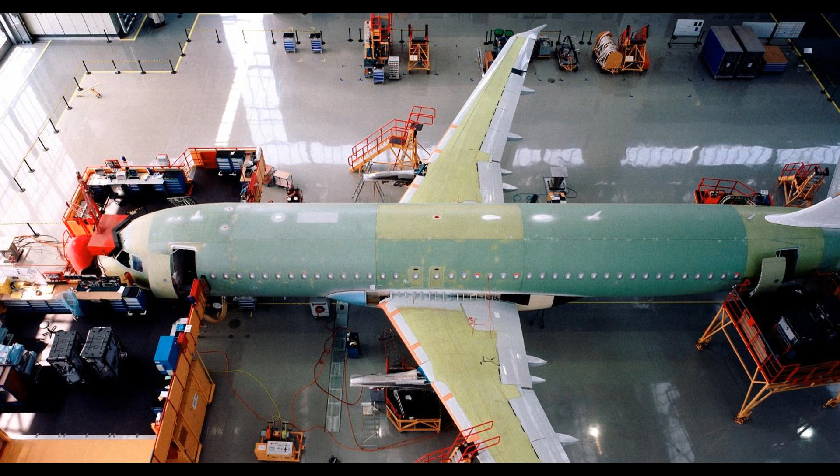To put you into context, as most of you know, over the last few years manufacturing and engineering professionals have seen their quality standards rise and their needs change. They now work with more complex parts, with more freeform shapes that need to be measured and controlled. The time to perform these measurements and quality controls is also under pressure, and it must be optimized in order to prevent downtime and streamline the development of new products.

So one question comes: how can 3D scanning help get through all of product lifecycle management without delay, in order to accelerate the time to market? This webinar aims to answer this question and demonstrate how 3D scanning helps overcome major challenges in order to launch a new product more efficiently.

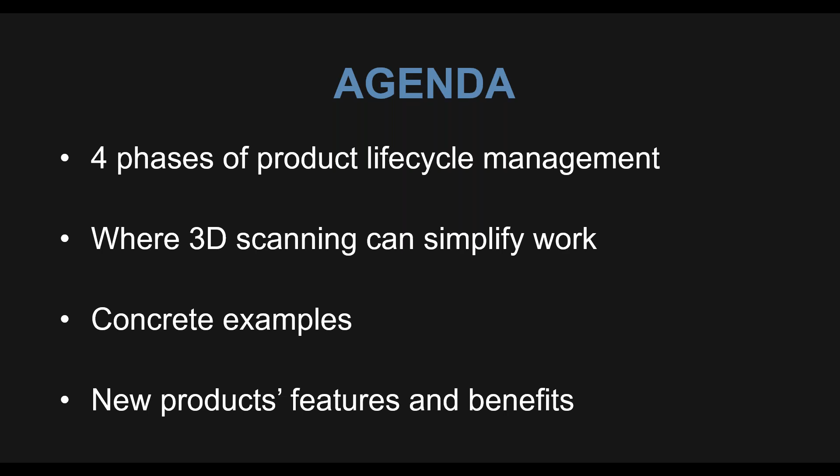To answer this question, let's look at the agenda we are going to follow today. First, we will review the 4 main phases of product lifecycle management. We will see where 3D scanning can improve and simplify work. We will illustrate the benefits of using 3D scanning with concrete examples in many applications, and then we will show our new products, features, and benefits. So first, I would let Simon start by quickly reviewing the main phases of product lifecycle management.

Thank you, Mathieu. Let's take a couple of minutes for the basics, just to make sure we are all on the same page. So what does product lifecycle management, or PLM, mean? By definition, it's just a standard process to organize ideas and guide action used to develop a new product. There are a couple versions of PLM, but let's take this simple and general one: concept, design, manufacturing, and servicing. Let's see how 3D scanning can help in each of these steps.

So first step, concept. This is the beginning of the development of a new product, where we generate new and crazy concepts. Very important step, because you define the requirements and specifications of the future product. Designers or engineers would create mock-ups or drawings, typically making iterations until the styling lines and requirements satisfy the development team. At this stage, they mostly validate the look and feel of the product.

During the concept phase, 3D scanning is very useful to perform environment and competitive product analysis. It's always a good idea to analyze competitive products and evaluate how they could be improved. The environment of the object can also be critical if you need mounting point or clearance information, for example. The information provided by a 3D scanner enables designers to start with reliable measurements they can trust.

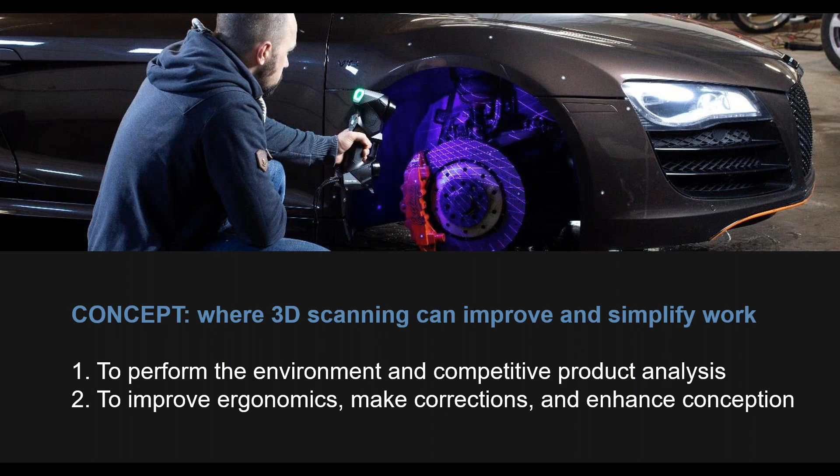So the design phase is where you want to get as close as possible to the real product. It's time for the designer to get their first fully functional prototype. With the real prototype in hand, the engineer can validate if the engineering is functional, if the components fit and assemble correctly, and if it meets the requirement.

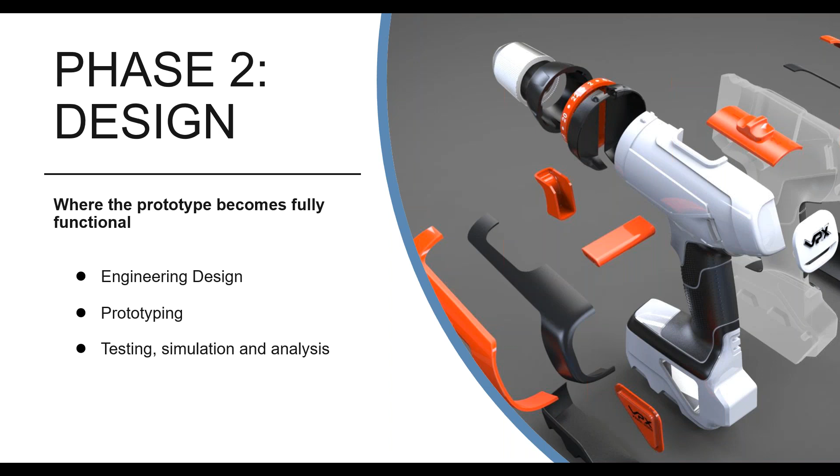It's also during the design that simulations such as finite element analysis, FEA, are performed to optimize the design. As in the concept phase, the design phase generally runs in a loop to get a better and better product at the end.

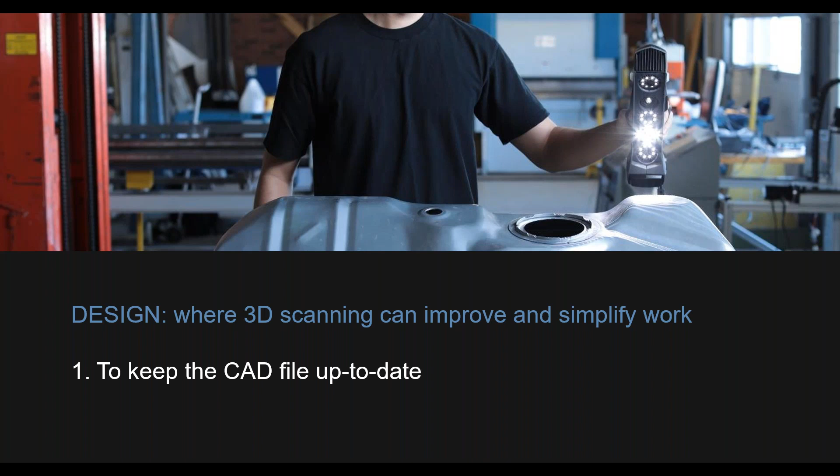So during design, 3D scanning is essential to keep the CAD file up to date after making modifications on the physical prototype. The 3D scanner can also be used for quick verification or inspection of the prototype itself. So once complete satisfaction has been reached, it's time to move on to the next phase, the manufacturing.

So in manufacturing, this is where units are produced. At this stage, production creates the tooling such as die, mold, fixture, or jig to manufacture the part. Once the tooling is validated and the first article inspection is performed, the quality control will measure, control, and document critical features to ensure constant production quality.

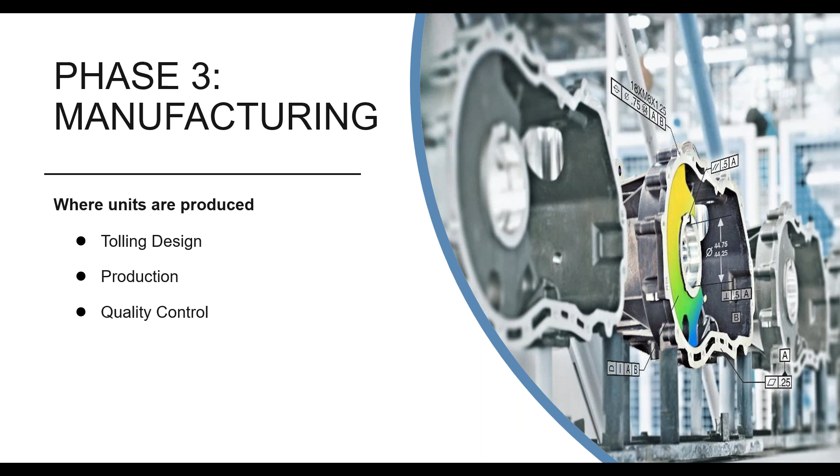During manufacturing, 3D scanning is very useful to design suitable tooling. It allows effective validation of the tooling and can also help to keep the CAD file up to date for those tooling as well.

As soon as the first unit is produced, 3D scanning is used to inspect and control the quality of the production by comparing the scan data with the CAD model, the first design. Since it can be used directly on the production floor, it can detect manufacturing problems quickly. If defects are detected, they can correct the tooling according to the measurement extracted with the scanner.

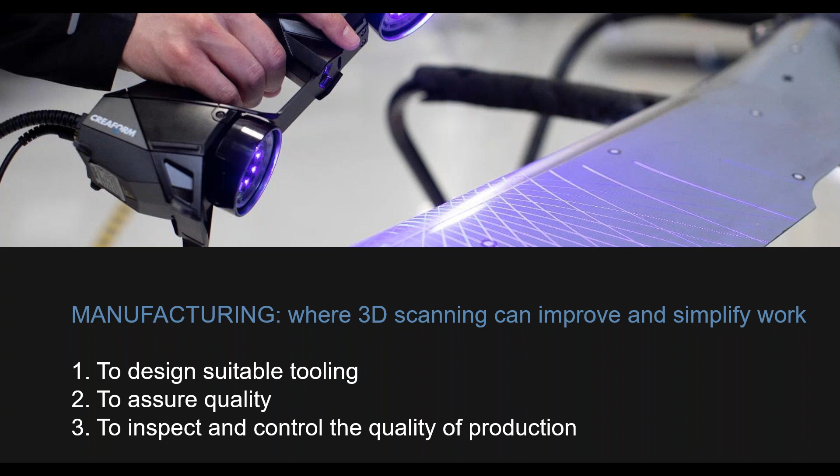So now we reach the final phase of the PLM, the servicing phase. This is where the unit comes to life in hand. For mass production that stretches over several years, as you know, tooling equipment may wear. So for instance, it may be needed to document how a mold wears out in order to maintain it. In some cases, it will be necessary to repair or replace components to maintain the production quality.

So where does 3D scanning help during servicing? 3D scanning allows engineers to document precisely how the tooling wears and helps make decisions to maintain the quality of the production setup. In case of a production issue, the scan data will help determine where to make corrections.

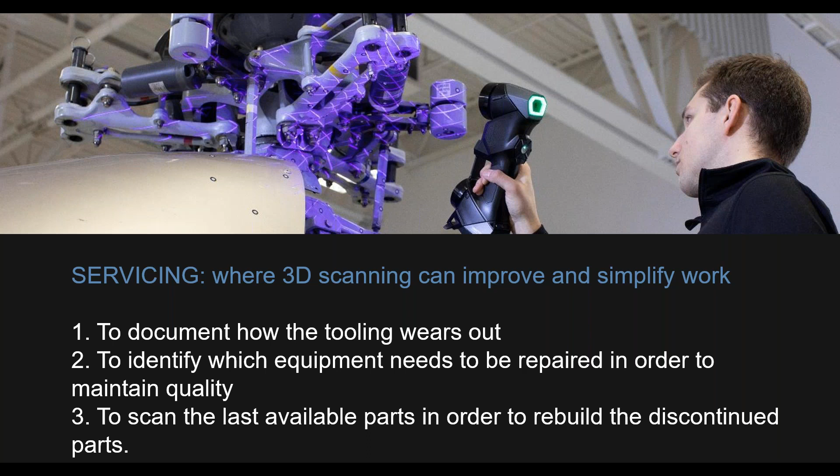And finally, if a system is made of old parts that can no longer be found on the market, 3D scanning is actually very useful to scan the last available part or broken part in order to get the dimensions, redo the CAD model, and manufacture the part again.

As you know, the challenges that development teams face are important. They must continuously innovate in order to deal with growing competition. So designers or engineers have to deal with more complex parts, but still have to deliver products faster than before. So yes, 3D scanning can definitely help them during different tasks, but it also makes the work more bearable and more efficient.

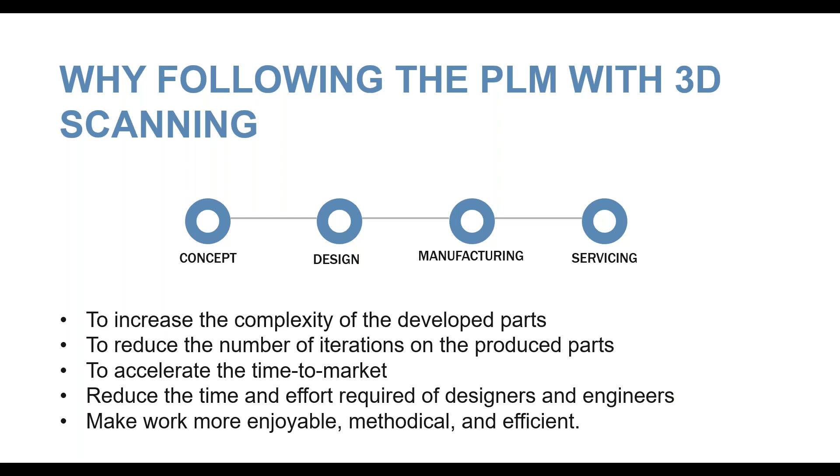So now I want to summarize graphically the advantages of adding 3D scanning to your actual PLM. Let's take this illustration with only the first three steps, concept, design, and manufacturing, to simplify the example.

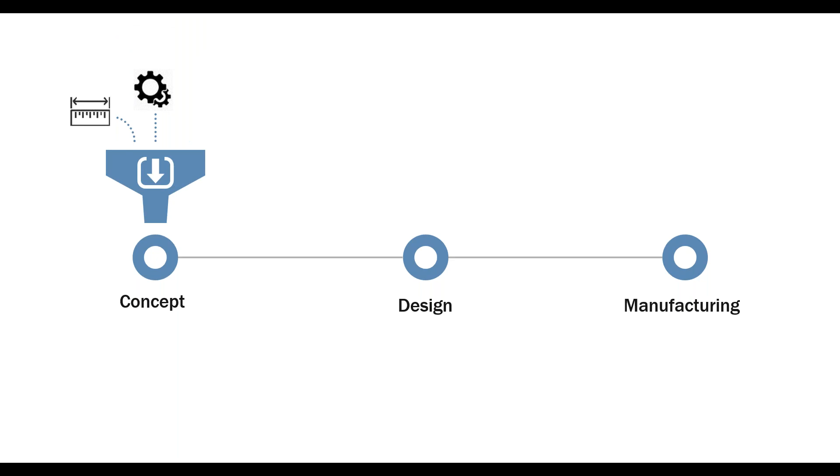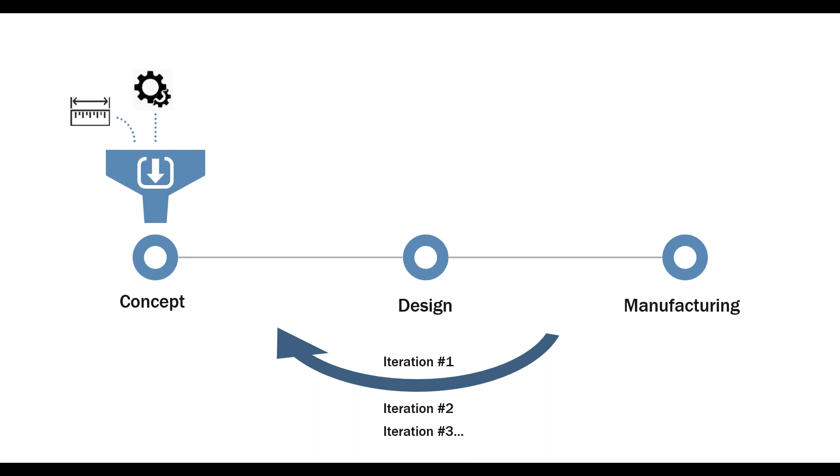As you know, you always start the concept with some input or some information. Then during the following steps, the designer or engineer will make several iterations to meet the final requirement. Those iterations during each step will actually slow down the outcome. And with simple inputs, the engineer will get simple output as well, a design that probably every competitor is able to do.

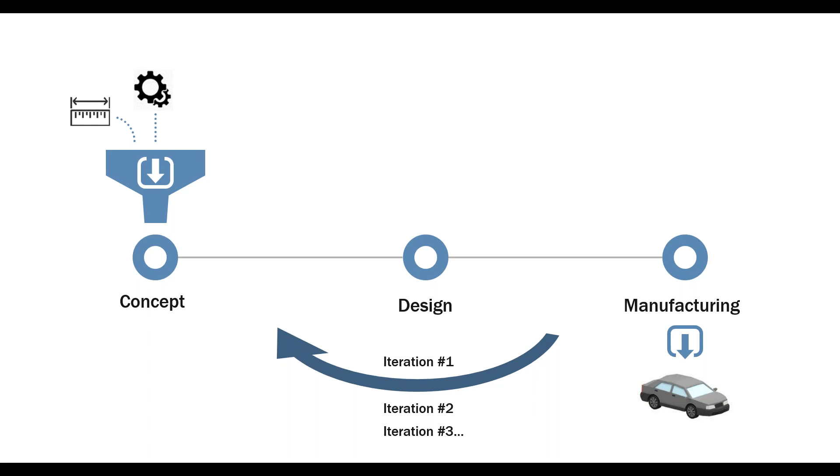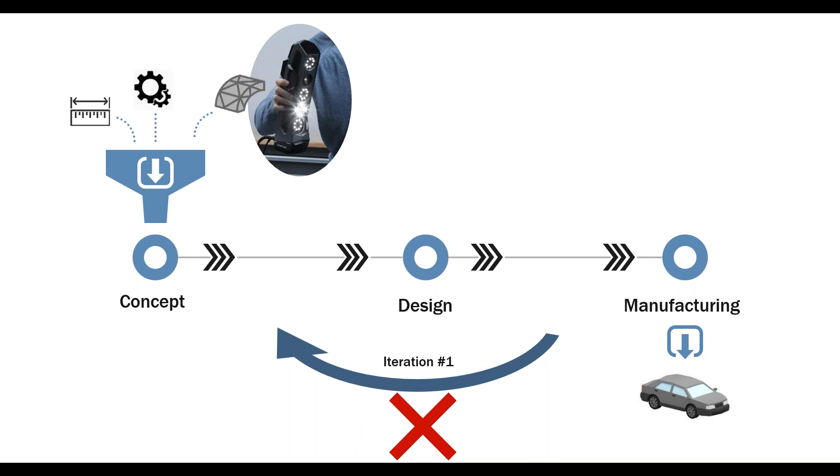But when adding 3D scanning as an input, here's the result: it will actually speed up the whole process and reduce the number of iterations. This is because the 3D scanner gives you critical information quickly to make clear decisions during all the different steps of your PLM, and having a better input will give you a better output as well.

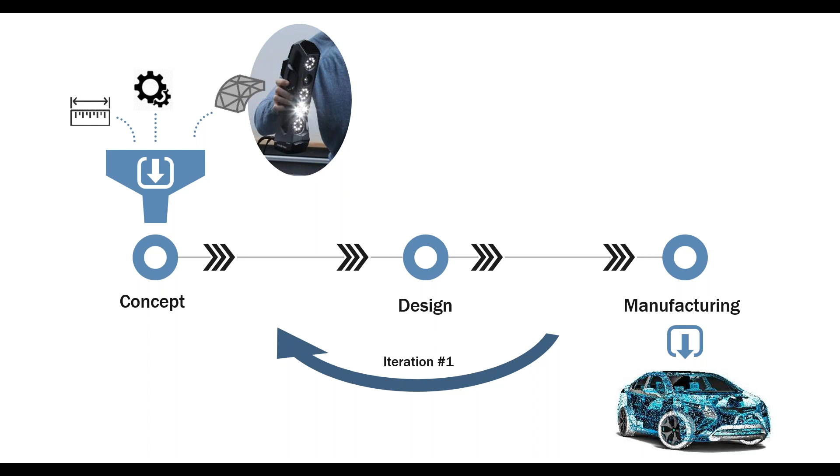So here's the reason why product development professionals need 3D scanning in 2019: a faster process and a better product at the end that will stand out from the competition.

So thank you, Simon. I will take it from here for the next few slides and illustrate the product lifecycle management with 8 concrete examples in different applications, such as product development and design, reverse engineering, rapid prototyping, inspection and quality control, maintenance and repair. And these applications will take place in different industries, such as automotive, heavy industry, consumer product, manufacturing, aerospace, and power generation.

So the first example is about product development and design in the automotive industry. And here is the question to answer: how can we efficiently design parts for automotive aftermarket without access to CAD files? For instance, how can an interior carpet be designed and quickly available for new car models?

Well, the challenge here in this product development is the multitude of car brands and models available on the market, which are also renewed every few years. Each car model requires a custom design, and measurements must be taken quickly on complex surfaces. This development must also be done very quickly to be the first on the market.

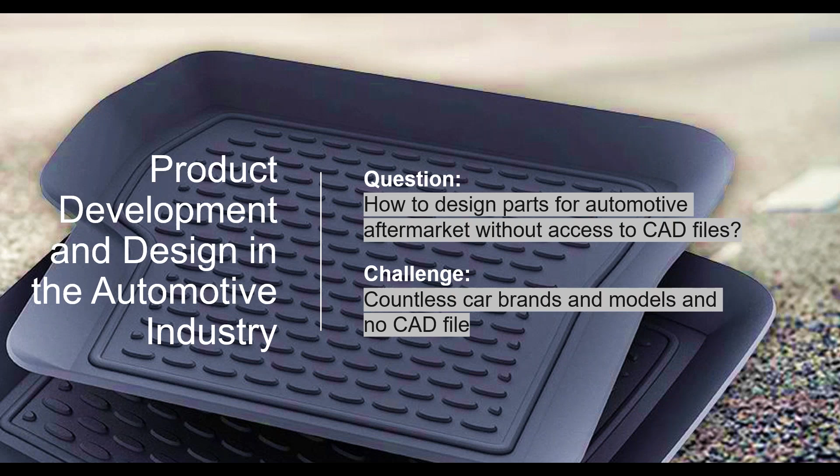So the solution is to use a portable 3D scanner to quickly capture these complex surfaces within a few minutes. This can be done anywhere as it requires a very limited setup time and acquisition time.

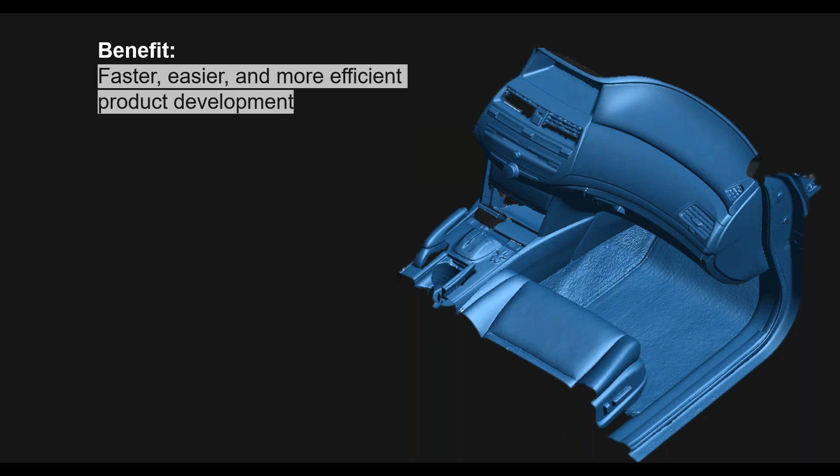Let's look at our second example, a reverse engineering application in the heavy industry. Now the question we are answering here is how to reduce product development costs with reverse engineering. Let's take the example of a bulldozer where an attachment such as a side boom has to be designed and installed. The main challenge here is not only to take a few measurements on where the attachment will be fixed, but to get all the surrounding information to prevent any interference with the attachment, especially with moving parts such as side booms. Without the CAD file available, the surrounding environment is unknown.

Another challenge here is to measure accurately spacing or distances between different objects or fixture points. Often direct distance measurement is impossible since there are different components blocking the way. This can lead to inaccurate measurements or a long measurement process if these components have to be removed. So here again, using conventional measurement tools is not an efficient solution. Instead, using 3D scanning will help to gather 3D data of all the surrounding environment, a process that would otherwise be lengthy using traditional measurement tools.

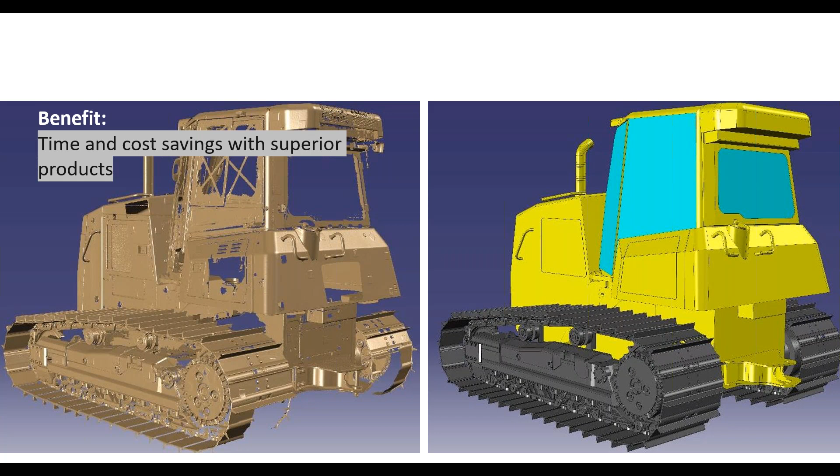This will provide the designer with the position and a high level of detail for every component, whatever their size, geometries, and finishes. Having all the surrounding environment is a huge benefit as it will allow preventing issues such as interference, as we talked about earlier. The accuracy of the 3D scan measurement is also another benefit compared to traditional measurements. It will ensure a proper fit right away when designing the fixture or other components, and it will eliminate adjustments and iteration in the design process. At the end, 3D scanning technologies will reduce the amount of engineering time spent on completing the project, which enables the manufacturing company to focus more on part design and also save cost.

Our third example, a rapid prototyping application in the consumer product industry. Again, the question now is how to accelerate rapid prototyping and production cycle time with clay models and 3D scanning. First, when designing a prototype, it is wise to make a first model in order to hold it and try it, as the physical reality is often different from the CAD design. Often designers will make adjustments, change style lines directly on the prototype until the perfect design is found. So the challenge here...

...is how to bring back these modifications to the CAD model. This can be pretty challenging, especially when dealing with complex parts and small details like on a helmet. The other challenge is to analyze what the market is already offering to ensure that the forthcoming design is better. Again, how can this information be brought back to the designers and ultimately optimize the final design?

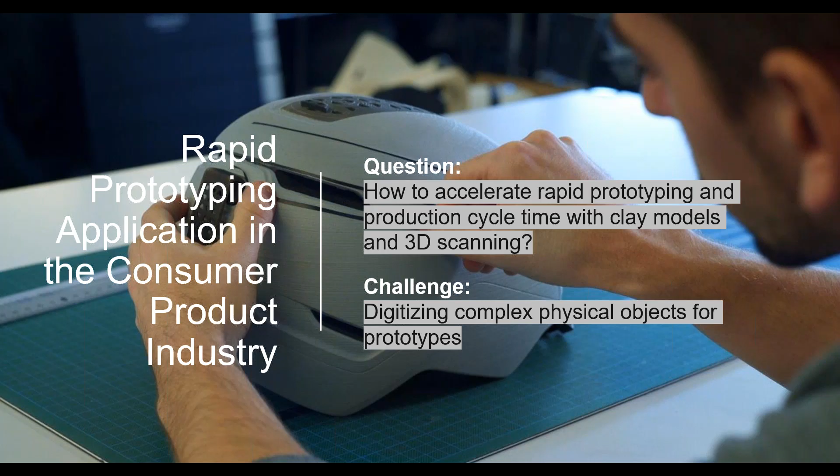So often clay models are used to design the first prototypes. Designers and engineers then have the flexibility and freedom to play with the prototypes until they achieve the perfect shape. 3D scanning is an efficient solution here as it allows capturing rapidly the clay model and its small details or complex surfaces that can afterwards be easily converted to CAD files.

The benefits here are diverse. First, 3D scanning will save a lot of time and accelerate time to market by eliminating the need for long measurement sessions and modifications to CAD files. The competition analysis can also be done quickly by converting the samples to digital models that are available to all designers and engineers anytime and anywhere.

Now our fourth example, a rapid prototyping application in the automotive industry. So how can we improve concept car design processes using 3D scan to CAD?

Well, the challenge here is a bit similar to the previous example. The first steps of the car design are usually done on a drawing board, and then the artist continues his work by realizing a clay model that he will refine. But how does one move from the artistic design to the engineering model, the CAD file, at the end?

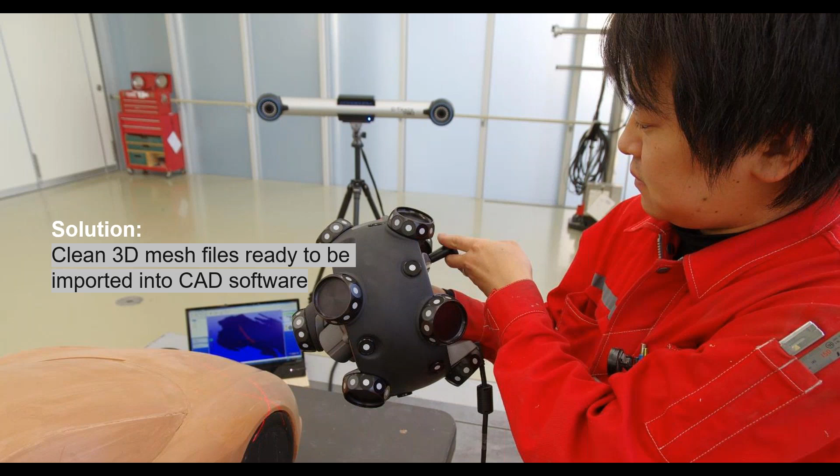Here a 3D scanning solution is essential to measure the clay model. The 3D scanner will provide a clean STL mesh file that is ready to be imported into CAD software. From there, engineers can start building each part according to the model designed by the artist. The benefit of 3D scanning is that the path between the clay model and the CAD file is much faster, because measurement and generation of accurate results are accelerated, and data transfer and editing are also simplified.

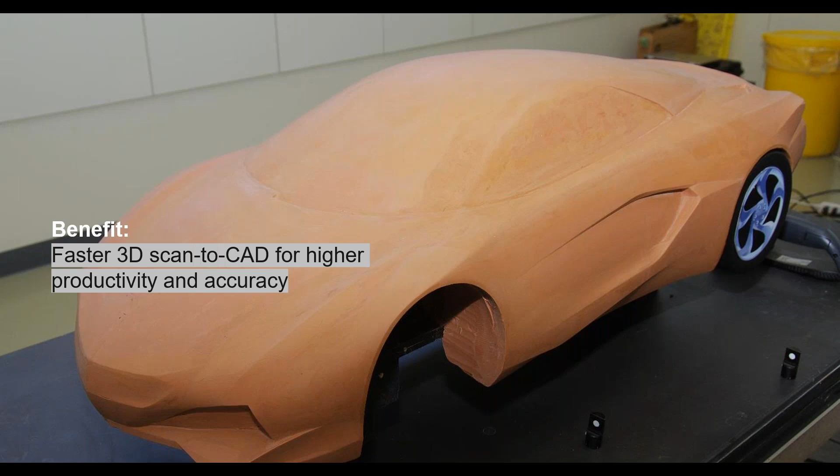Our fifth example is about an inspection and quality control application in the manufacturing industry. How can we accelerate the inspection process in tool design with intermediate quality checks?

When designing a tooling, an iterative process of quality control ensures that the part built from the mold or die is built correctly and meets technical requirements. The challenge is to speed up this quality control process by reducing measurement time and limiting the number of iterations for adjustment.

Traditionally, the inspection process was done using touch probing with CMM. Instead, using 3D scanning helps accelerate the inspection process. A 3D scanner can acquire more than 1 million measurement points per second, compared to just a few with touch probing. This acquisition speed and data density allow creation of deviation color maps.

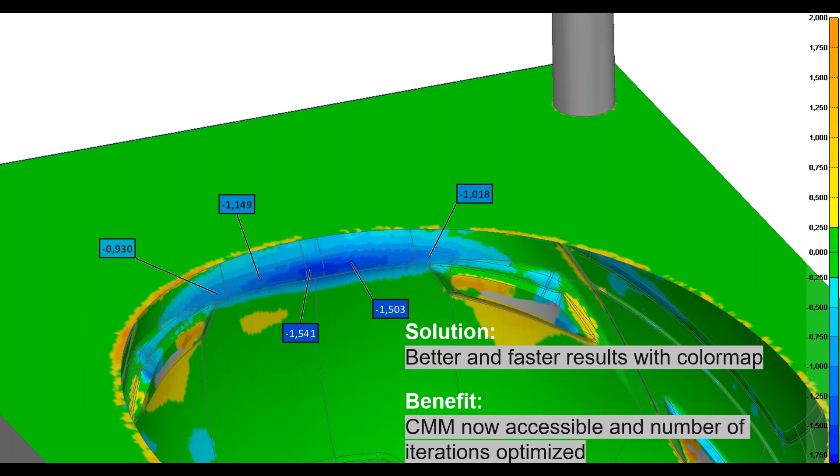These color maps give a much better visual overview of the deviations, and show precisely where to make adjustments on the mold or die. In the end, the benefits are a reduced number of iterations in the quality control process, and reduced bottlenecks created by CMM touch probing inspection.

Our sixth example is also about inspection and quality control, but in the aerospace industry. The question is, how can we develop, manufacture, and inspect a casting of superior quality in less time?

The main challenge when creating a casting is to minimize the amount of material used, for two main reasons: to avoid wasting material, and mostly to reduce the machining time needed to remove extra material. But how can we ensure there is enough material before machining, while making sure we're not wasting precious and costly machining time?

The best solution here is to be able to inspect 100% of the surface, and that is the challenge with traditional measurement tools.

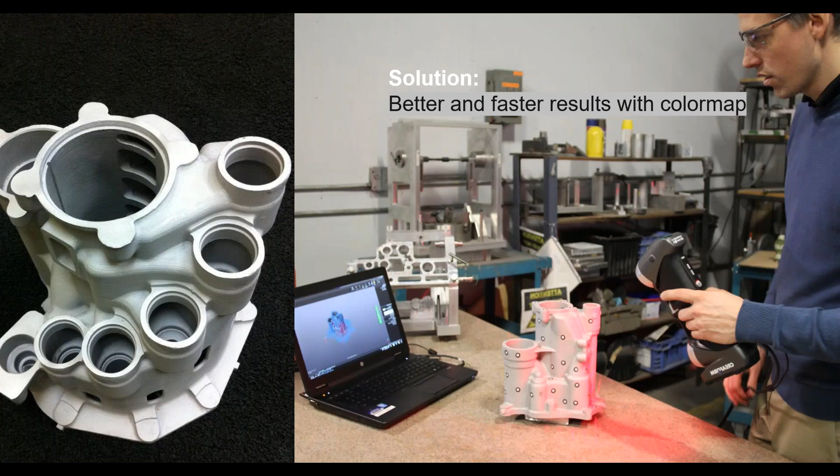Touch probing equipment such as CMMs are pretty good for providing highly accurate data on critical parts, but it would take hours to measure 100% of the casting surface.

Unlike touch probing, 3D scanning provides a better solution with an overall 3D deviation color map of the part, indicating whether or not there is enough material before machining. All inspection data can be provided quickly and with no delay.

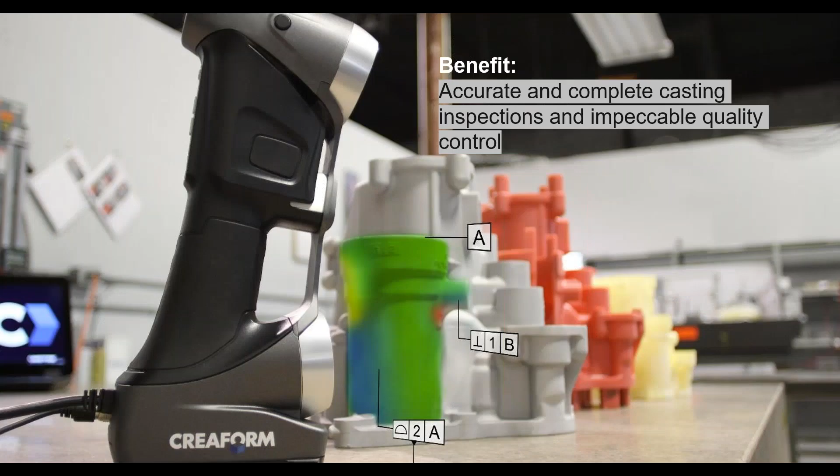So the benefits of using a 3D scanner: it accelerates the casting manufacturing process, and a more complete inspection process allows issues to be identified beforehand and fixed before they cost more time and money.

Let's move to the seventh example. It concerns a maintenance and repair application in the power generation industry. The question here is, how can we replace headers on a main steam piping system at a power generating facility?

Replacing these headers in a power generating facility can be challenging. Most of the time, CAD models are not available, so engineers have to design the new parts by measuring the actual physical part. Additionally, these headers are often located in very confined or hardly accessible spaces that are only available during limited power plant shutdowns. So both the on-site measurements and the later replacement and installation must be done quickly.

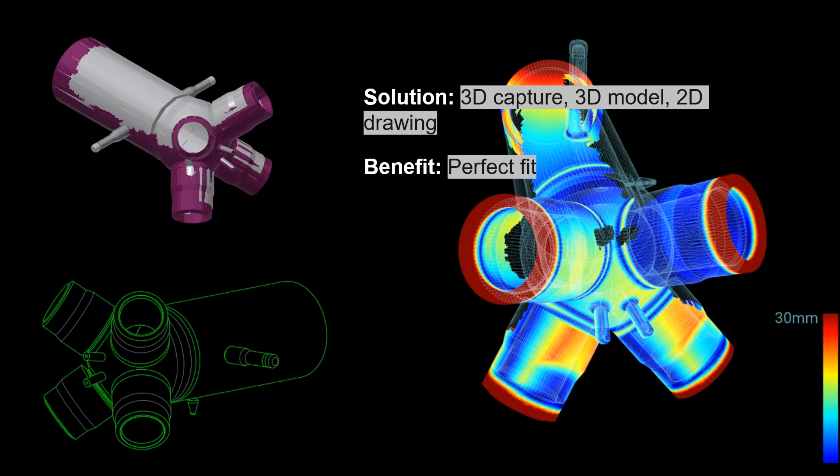That's a challenge. Inaccurate or missing measurement will lead to a bad design that can require hours of costly on-site adjustment when installing the new header in the next shutdown. Worse, it could delay the installation if adjustments to be made are too critical. Using a 3D scanner here will solve these issues. First, it will ensure all measurements are taken when the equipment is available. Second, it will ensure that measurements are highly accurate and that the replacement part will fit precisely. At the end, it will accelerate the design and replacement time as well as its cost.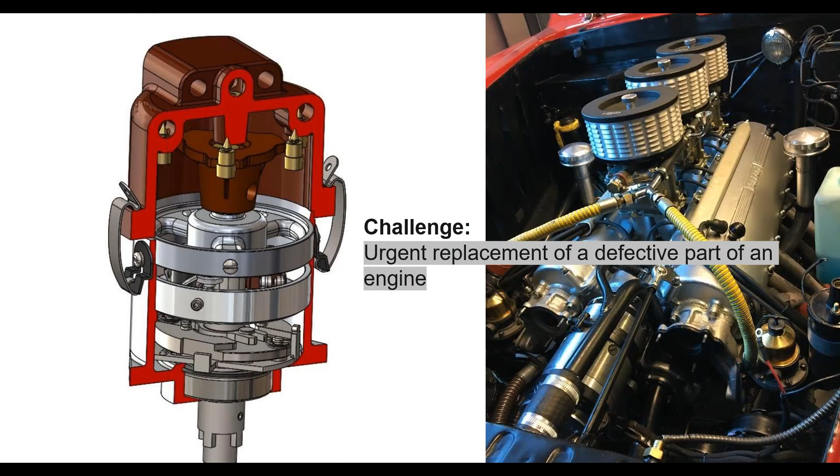And finally, the last example concerns a reverse engineering application in the automotive industry. This is a pretty neat one. The question here is, how can we participate at the Monaco Grand Prix despite a broken engine 8 weeks before the race? As you might know, the preparation for a car race always requires a series of tests on the engine, and all the components must work at their full potential, since the race would put them to the test. But what can one do when the connecting rods, the rod that moves the piston up and down, come out of the side of the engine 8 weeks before the race? Well, this is a challenge that one of our clients had to face. He had to repair his engine within a few weeks of the competition, but not all parts could be fitted.

Well, thanks to a 3D scanner, the data from the parts to redesign were quickly scanned. The scanner was able to generate a precise mesh that was easily transferred into a CAD file. And 5 days later, 12 pistons went into production, and the new parts were ready 3 weeks later. So the benefit here in using a 3D scanner is it improves reaction times by allowing accurate measurements to be quickly taken anywhere. It also allows sending these digital models to anyone, anywhere, to start the design and production process very quickly. This accelerates the design process, and production of custom parts is done at record speed. So that's the end of the examples I had to present.

I will let Simon continue with the next slides and explain how Creaform's new products can help in your product lifecycle management.

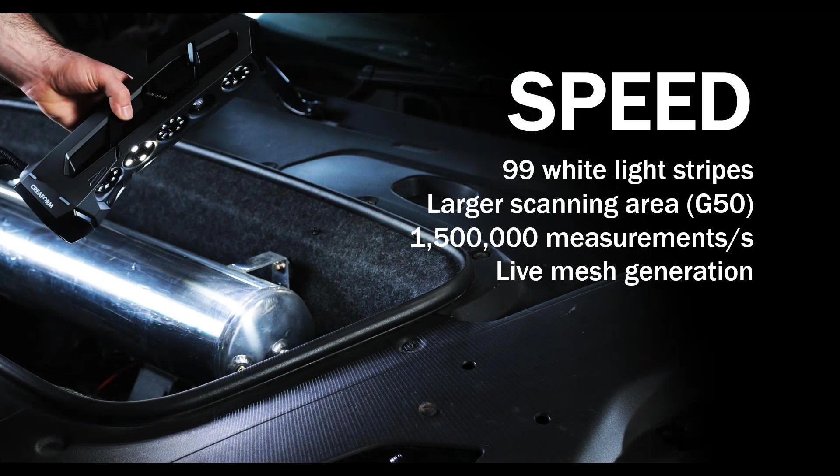So first, let's talk about speed. The GoScan Spark uses a 99 white light stripes to acquire the data. It now has 3 times more measurements per second than the previous generation, with 1.5 million measurements per second. New algorithms in the acquisition software provide live mesh generation that delivers the speed and visualization to help our customers capture quickly and easily any surface.

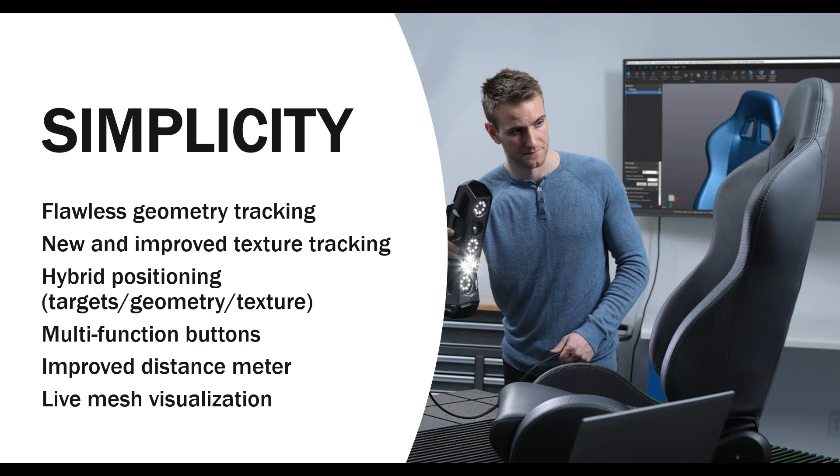So speed is not everything. Since our engineers are not experts in 3D scanning, they need a system that is extremely easy to use. This is why we added a lot of improvements to the scanner and the software to get robust tracking using geometry, texture, or targets to provide the best user experience. Let me explain a bit more about the tracking. This is the result of the best and easiest hybrid positioning available on the market. The GoScan Spark can use geometry, texture, and targets to align all the 3D data together. So translating that into the mind of our product development engineer: don't think about how it works, just go, just scan. This is the kind of simplicity that they need.

As you can see here on the image, this is the kind of object that can be easily captured with the GoScan depending on your application.

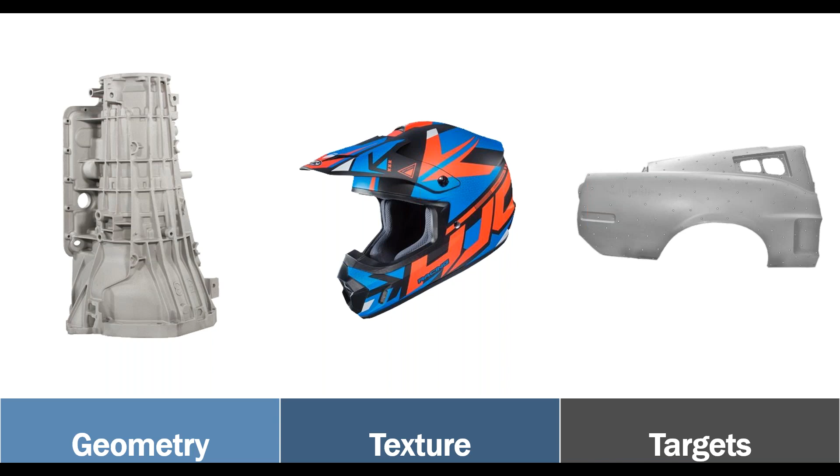All this without having a quality scan is simply irrelevant to designer and engineer. They need quality inputs. So this is why we changed the camera for 3 high resolution cameras for the geometry and 1 color camera that can create 200 dpi color texture.

So yes, with the GoScan Spark, we also capture the texture of the object. In terms of resolution, the GoScan Spark has 4 times the resolution of the previous generation.

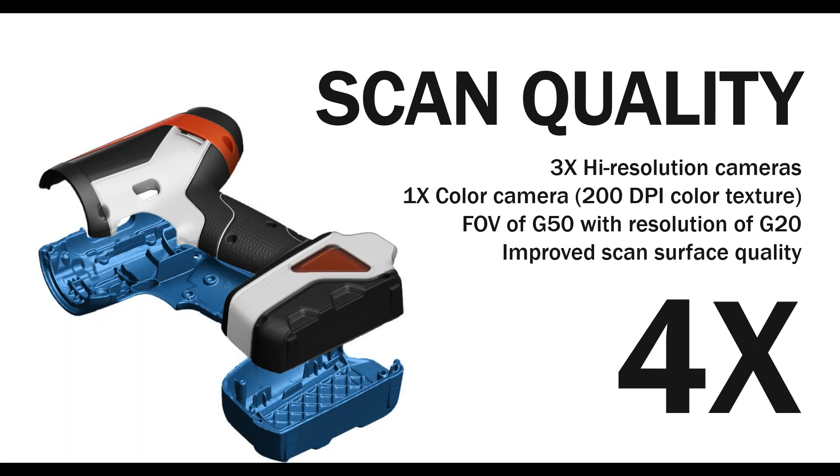So in summary, the GoScan Spark provides the speed, the simplicity, and high quality scan for a large range of product development applications.

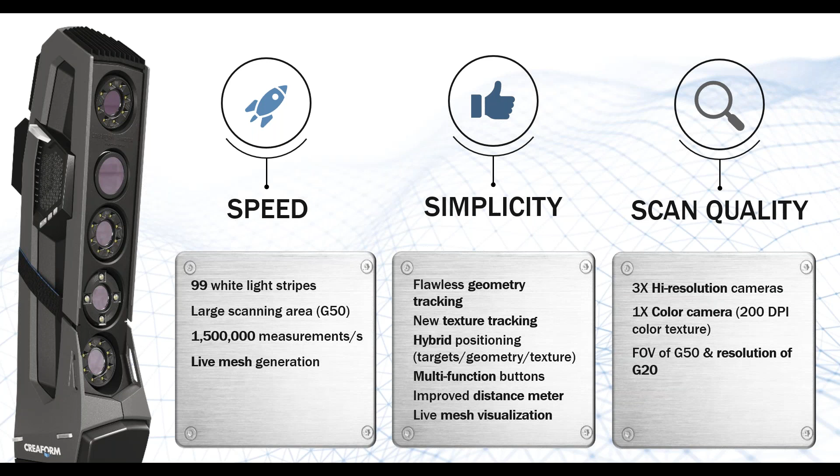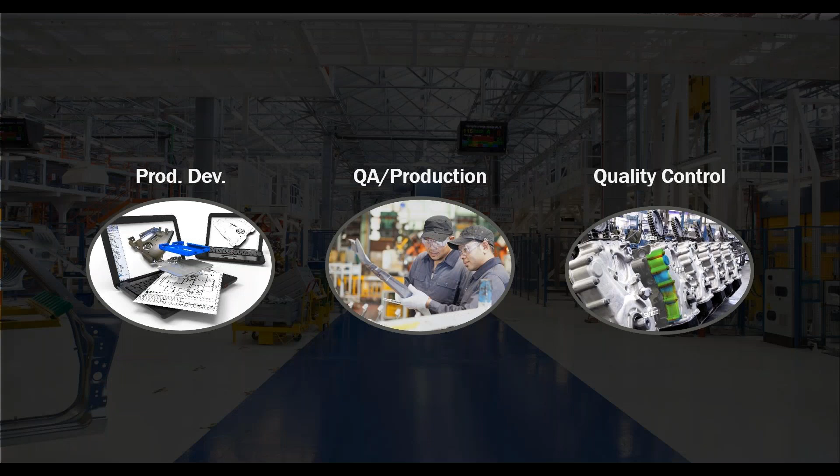Now let me introduce you to the new HandyScan Black, the reference and portable metrology grade 3D scanning. A new design with new optics to better meet the requirements of our customers. The HandyScan has always been the go-to scanner for a lot of situations and for a lot of our customers to solve problems in product development, in quality assurance and production, and even for quality control.

Here are the main benefits of the HandyScan Black. The challenge in developing the reference and portable 3D scanning is right here: delivering a product that can provide all these benefits at the same time - portability, simplicity, speed, accuracy, scan quality, and versatility.

It's not so hard to create a portable 3D scanner that is not accurate or reliable. It's not so hard to create or develop a 3D scanner that will have good scan quality and good accuracy, but for a very specific size of part and very specific material. What is hard is when you develop a 3D scanner that can do all of them. And this is what we achieved with the HandyScan Black.

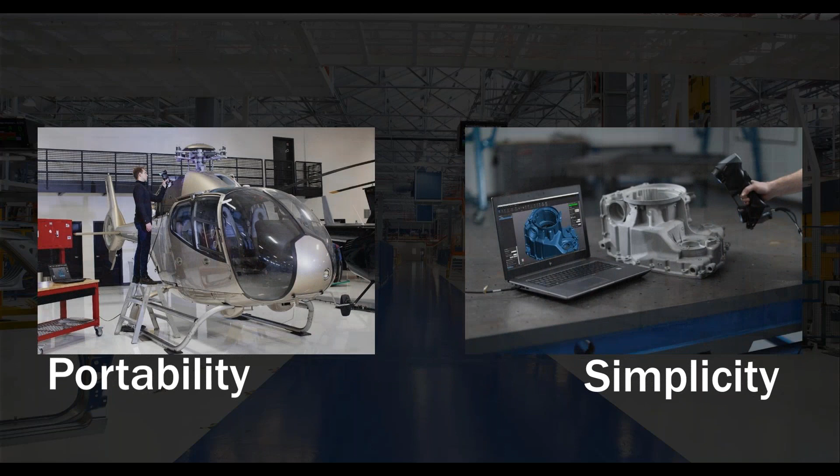I'm not going to talk about the portability and simplicity of the HandyScan Black since they are a given to me. Portability and simplicity are still the main reason why our customers are purchasing Creaform devices. But during this presentation, I will talk more about the 3 other benefits that have been improved significantly with the HandyScan Black: the speed, the metrology grade - where we combine the scan quality, the accuracy, and measurement reliability - and the last one, the versatility.

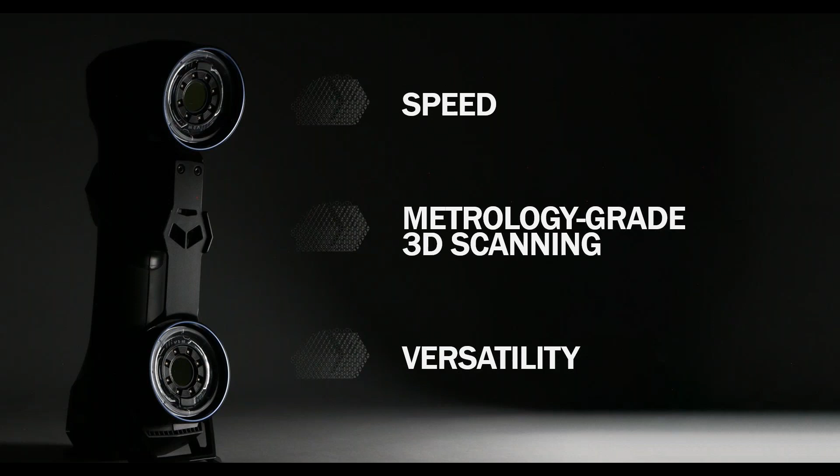So let's start with the speed. We now have 11 blue laser crosses with a large scanning area. New blue laser technology combined with new optics will allow the system to collect 2.7 times more measurements per second, reaching 1.3 million measurements per second.

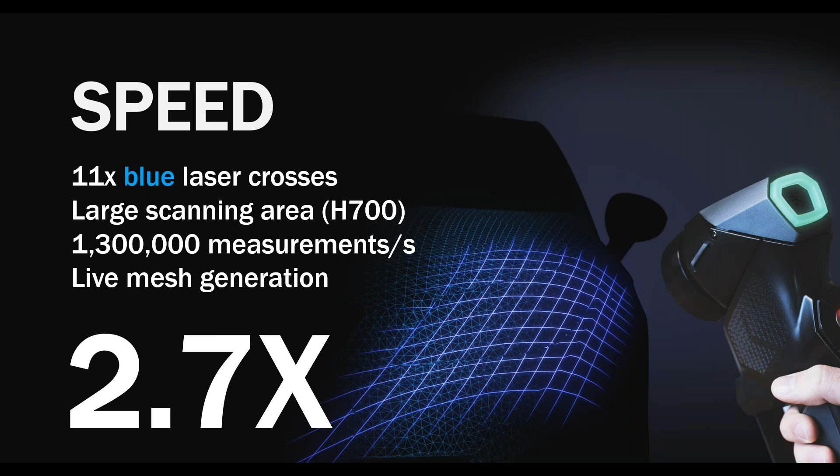The HandyScan Black also has live mesh generation. So yes, with Creaform scanners, we generate STL files right away after scanning. The output of our scanners are STL files.

Now let's talk about the metrology grade 3D scanning. The accuracy of the HandyScan Black now reaches 25 micron. We rely on the German standard VDI/VDE 2634 part 3 for acceptance tests, and Creaform is now 17025 accredited for the HandyScan Black. This ensures full traceability of the system when taking measurements with the HandyScan Black.

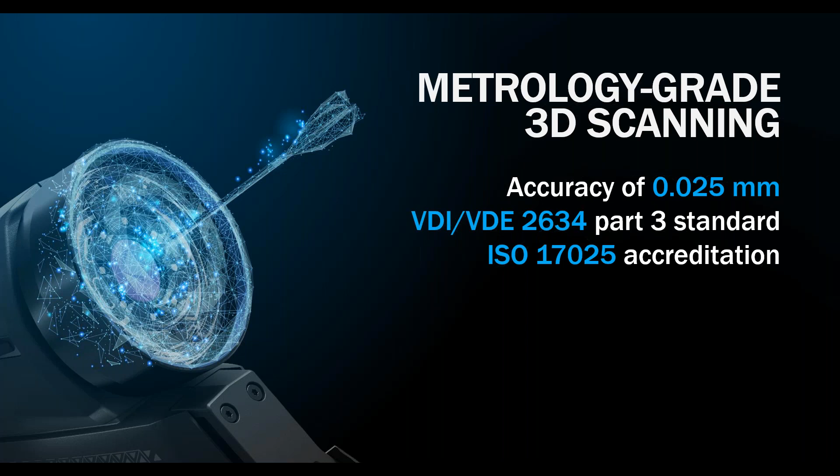With the addition of new high-resolution cameras, new lens and blue laser, and a completely new surface reconstruction algorithm, the HandyScan Black has 4 times the resolution of the previous generation.

This improvement of the resolution of the HandyScan Black will open new doors to various applications such as small injection plastic, small casting, sheet metal, or 3D printed parts.

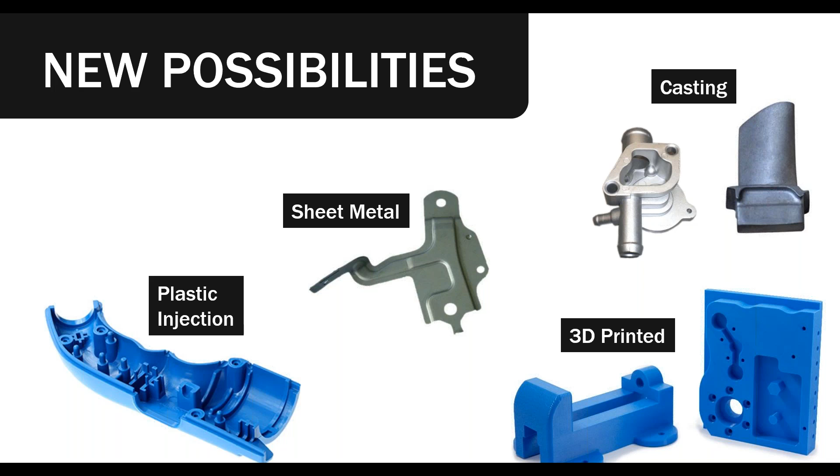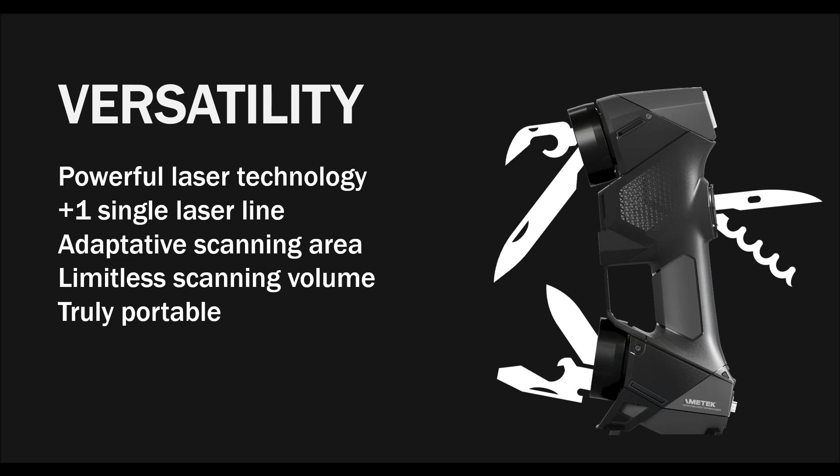Now let's talk about the versatility, a very important differentiator for the HandyScan. With various features like its new powerful laser, the single laser line, the adaptive scanning area, and limitless scanning volume, and even true portability, it helps to be the best tool for pretty much every part size, for every material and part finish, and for every part complexity. Regarding shiny surfaces, the HandyScan Black can capture shiny surfaces such as machined surface or chrome surface.

So in summary, one device for a project from a small gear to a full vehicle cabin in and out. This is the definition of versatility in 3D scanning. And this is the kind of project that can be done with the HandyScan Black. Again, one device from small part to a large object.

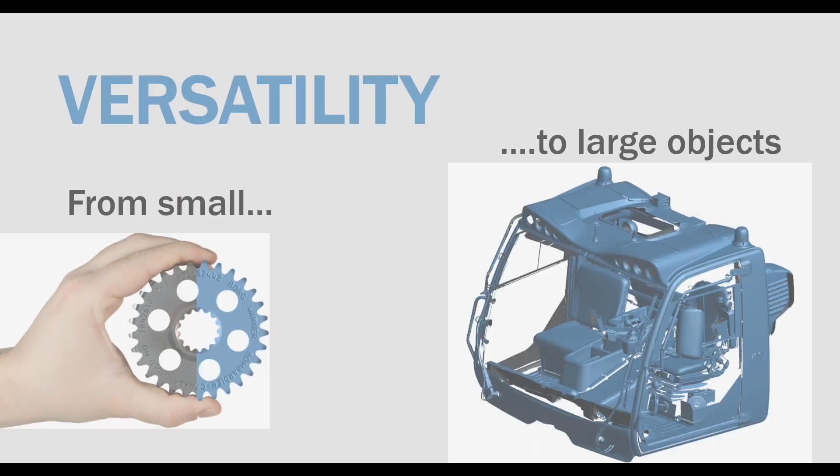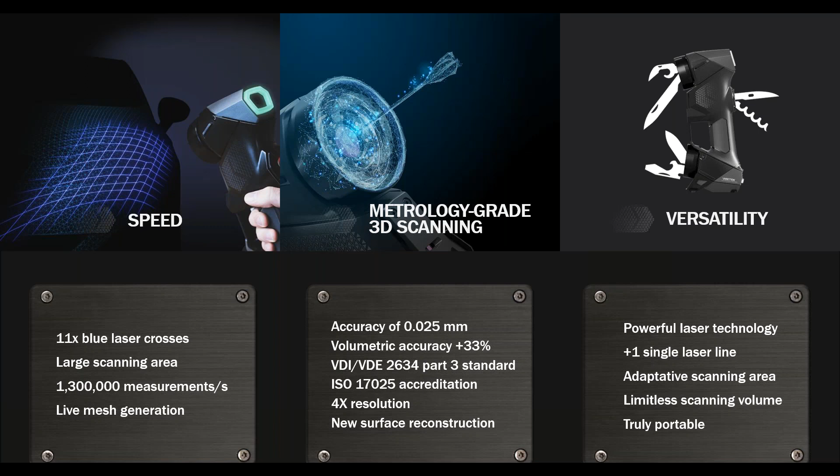So in summary, we improved significantly the speed, the metrology grade, and the versatility with the new Handyscan Black. I'm not going to mention every feature in this slide since I already talked about it, but it's just more and more in all aspects compared to the previous generation. So our new Handyscan Black is ready to help the most demanding manufacturing customers.

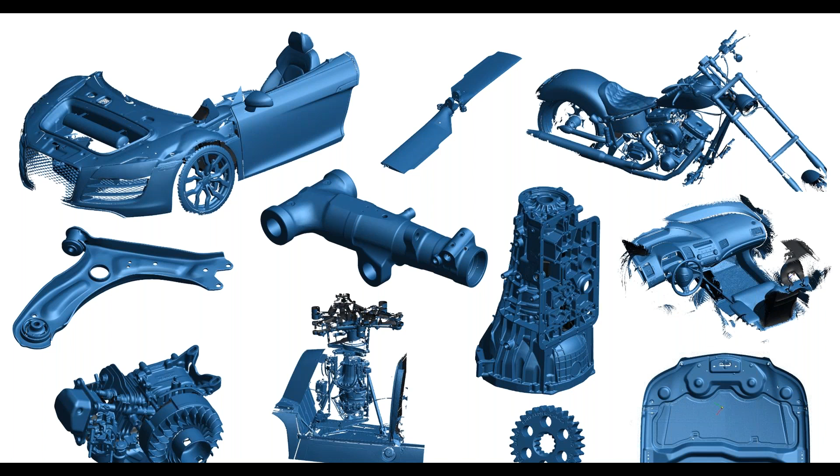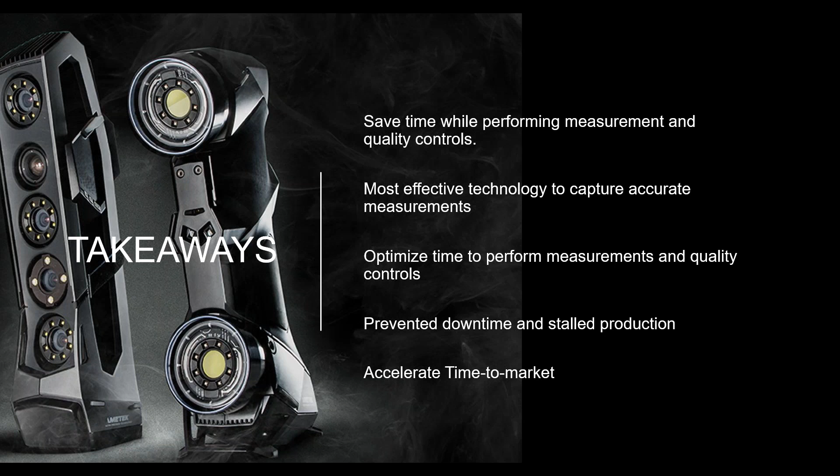First, 3D scanning helps manufacturing and engineering professionals save time while performing measurements and quality control. Also, 3D scanning figures among the most effective and reliable technologies to capture accurate dimensional measurements of physical objects. The time to perform measurements and quality control can be optimized because of 3D scanning. Downtime and stalled production losses can be prevented. And at the end, the time to market of a new product launch can be accelerated because of 3D scanning.